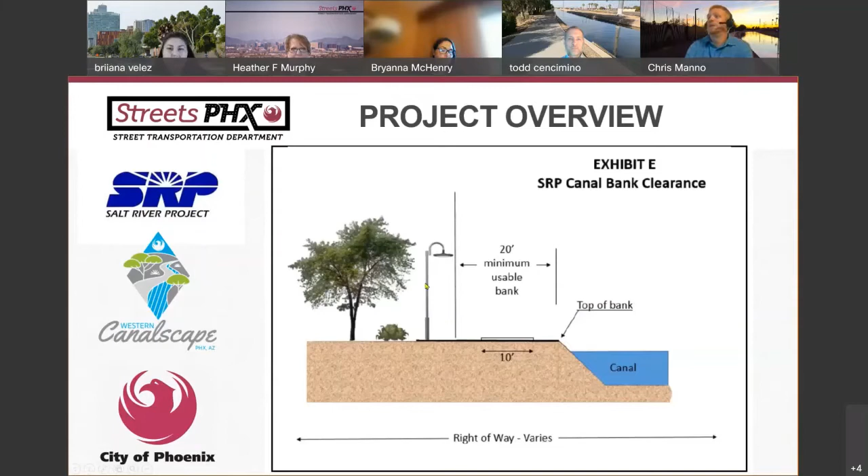Continuing with the project overview, we've covered the partnership, and now I want to talk about where we're building. We're going to be building along the Western Canal between 4th Avenue on the western end of the project and 24th Street on the eastern end. Our new pathway, matching that typical cross section from the last slide, will be all on the south bank of the canal in this area.

The canal runs mostly west to east. It does have a little bit of a skew in it, and I'll show you on the map in an upcoming slide a better picture of where this falls within the City of Phoenix. But that is the project limits, between 4th Avenue and 24th Street.

I have a couple photos up, basically a before and after of what we hope to accomplish. The left-hand photograph is a before shot along the Western Canal. This is what it looks like today—it has a dirt and kind of gravelly type surface. It meets the needs for SRP to use this on a day-to-day basis.

It does provide an area for recreation for members of the community to use today, but the goal is to provide a nice smooth concrete surface that everyone's able to use for longer periods of travel. The left is the before shot and the right is what we hope to build at the end of the project by installing the 10-foot wide concrete pathway you see on the left-hand side of the photo.

You have some decomposed granite and some landscaping off to the side where we have the space to do that, and we also have some pedestrian lighting throughout the corridor.

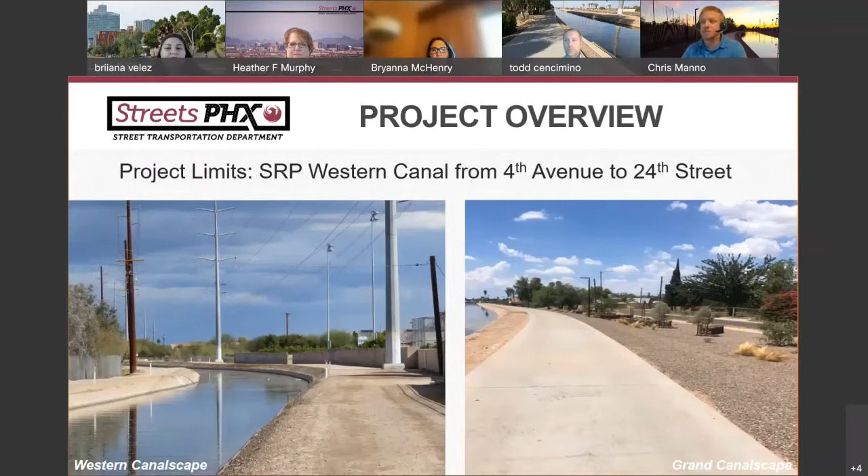So now we have our 10-foot wide concrete multi-use path, pedestrian lighting, and landscaping where possible. Now I'm going to drop that into the map to give you a better picture of how big this project is.

The Western Canal lies just north of Baseline Road and south of Southern Avenue. You can see that it mostly runs east to west, but it does start to skew a little, running more north and south at the west end of the project.

Now that we have our smooth, continuous pathway, we are going to encounter some major streets along the path, and we've figured out how to keep that continuity and provide safe crossings at each of these locations. I'm going to list the new traffic signals we will be installing as part of this project, laid out from west to east.

Starting on the west side at 4th Avenue and Baseline Road, we're going to be installing a new traffic signal at this location. Number 2 is Central Avenue — we will actually not be installing anything at this location. As most of you know, we have the light rail South Central Phoenix extension project currently under construction, and we are coordinating with that project so ours will just tie right into theirs. The light rail project will be doing all the improvements at this crossing.

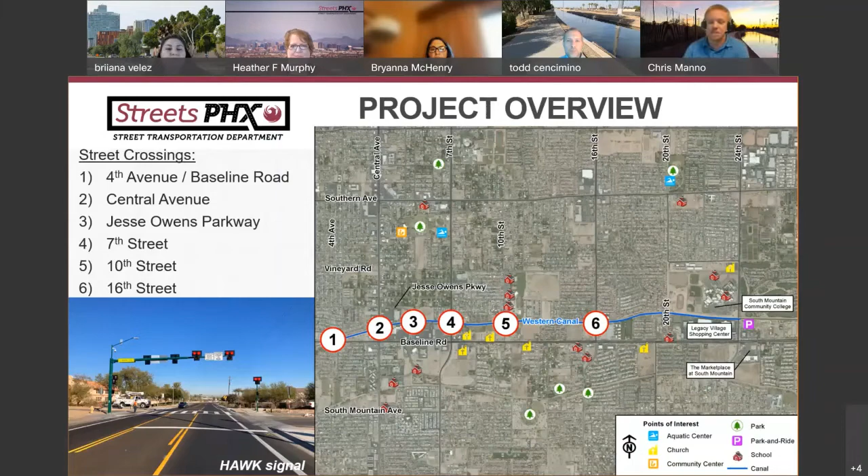A few other things to note while I have the map pulled up: there are several points of interest throughout the area. Some are directly adjacent to the path and will have a connection or gate right up to the new path. Some are just close in proximity, maybe a half-mile or a mile away. We've highlighted some on the screen. We know this isn't all-inclusive of every amenity in the area, but we highlighted some neighborhood parks, public transit, churches, aquatic centers, and community centers. The list goes on and on of benefits to this community, and I'm going to highlight how we'll provide connectivity to most of these facilities.

So a little more on the purpose and benefits—why are we building the project, and what's the major benefit? The main thing is a safe route for pedestrians and bicycle traffic. This is a great opportunity, as Brianna mentioned, to bring pedestrians and cyclists away from the major arterial roadways, giving them something aesthetically pleasing to look at and utilize, and we hope that'll encourage people to use this facility on a daily basis or in their regular routine. We feel this is a great opportunity to get them away from arterial streets where you might have higher vehicle traffic and more driveway conflicts—this will be a more low-stress corridor in this area.

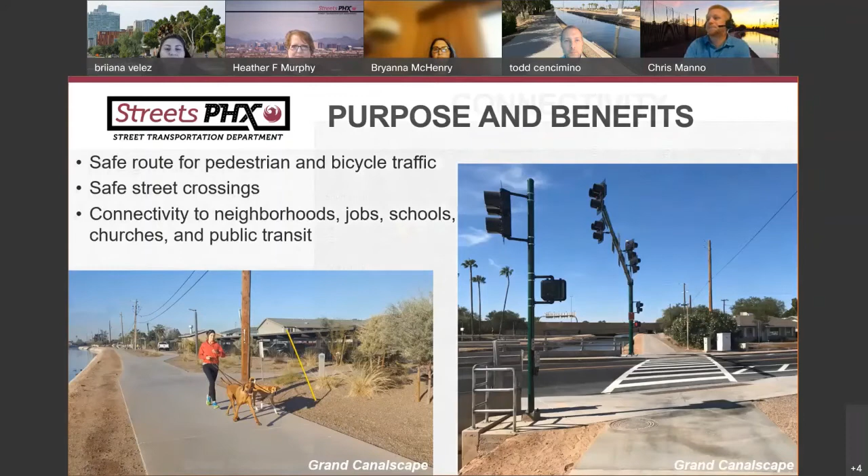Okay, so I got another map here on the screen. I'm going to talk a little bit about some of the areas of connectivity here, and bring back the public input opportunity that we had at our last public meeting back in January.

We had identified 3 locations where we asked for potential areas of putting in a new pedestrian bridge. We felt this project could incorporate a pedestrian bridge, but we wanted input to see if the community wants one, where they want one, and where it would work from an engineering standpoint, weighing all those factors to enhance connectivity.

Through using the public input, we decided to move forward with installing a pedestrian bridge at location B near 13th Street. Now, I still want to highlight areas A and C, at the east and west ends of the project, because even though we can't install a pedestrian bridge at these locations, there's still a great area of connectivity and opportunity there.

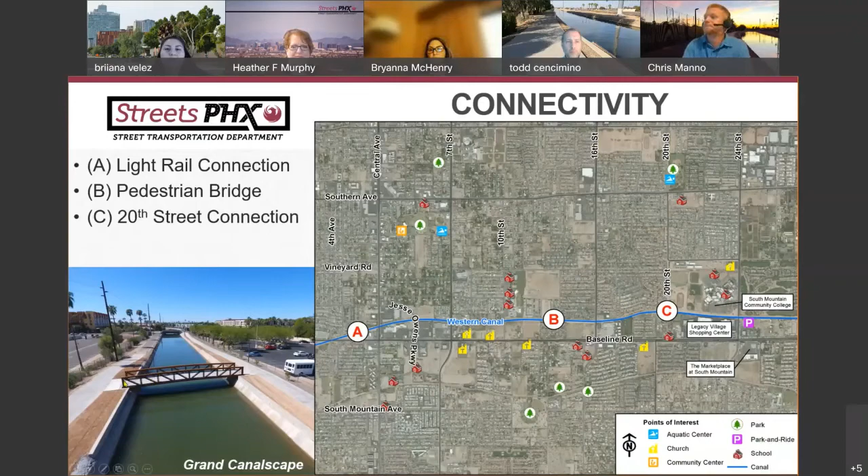Okay, so the light rail connection - hopefully many of you are aware we have this project going on right now, with utility work and construction. It's a very large project, but it's going to be constructed at Central Avenue, with a new station and a new HAWK crossing that they're going to build, and we're going to tie right into that.

As part of that station, Valley Metro is also moving forward - they've acquired a property and are going to build a new park and ride facility that'll bring people close to the canal and light rail. You can move around very easily down in the western end of the project near 4th Avenue and Central Avenue.

The pedestrian bridge - I talked about what this bridge might look like. We just have some photos of what a typical bridge or this bridge is going to end up looking like. We're still in the design phases working out some details, but the color scheme and aesthetics are going to be pretty close to what we end up doing across this canal.

We're going to make sure it meets all the SRP design guidelines, and they can still maintain their canal. So this is just a quick shot to show what the bridge may look like. Again, the bridge location is going to be 13th Street - there's a bunch of established neighborhoods at this 13th Street location to the north.

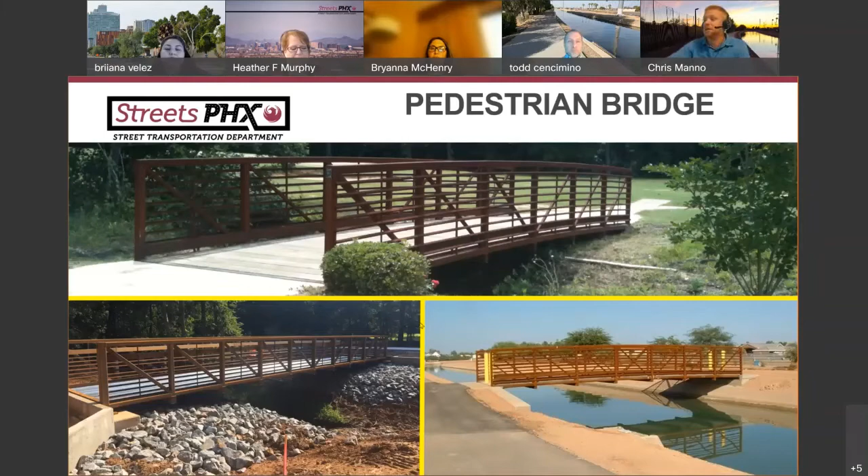Area C was the 20th Street connection, the last point of connectivity I wanted to mention. Even though we're not going to move forward with the new pedestrian bridge at this location, we feel the connectivity here is a good opportunity because we actually have a small pocket of right-of-way, City of Phoenix right-of-way, that we can use to enhance that connection.

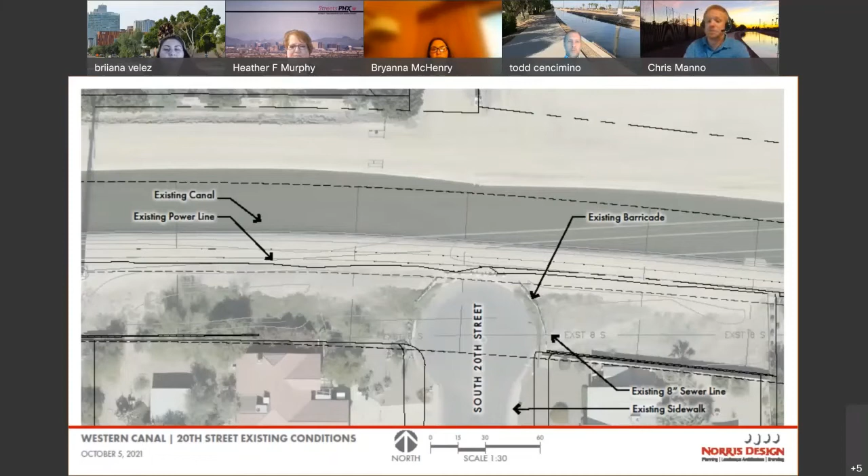So the screen shows the cul-de-sac for 20th Street in the center, south of the Western Canal which runs through the middle of the screen. There are pockets of right-of-way to the east and west of this roadway. Right now there's some vegetation going on and it's not utilized very well aesthetically, but we have existing utilities, which is why the right-of-way is there—some sewer lines underground and overhead power lines coming in over top. Still, it provides an area where we can get some aesthetic upgrade, and that's why we wanted to highlight how we were able to upgrade this area and still provide a connection without that pedestrian bridge.